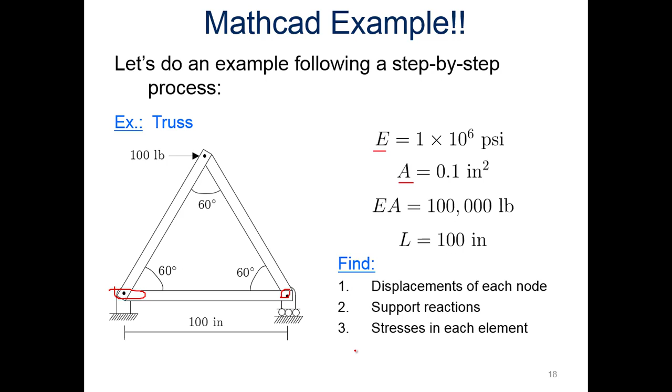All right, let's get to it here, just following that solution path that we have for finite element. First is the pre-processing phase. We need to determine what the nodes and elements are, and declare what they are up front.

We're going to say we've got node 1 here in the bottom left, node 2 on the right, node 3 at the top, and then element 1, 2, and 3. And again, we have to specify very carefully how these are set up.

So here's a table to show you that. Element 1 is made up of node 1 and node 2. Referring back to what we talked about previously with node I and node J, for element 1, node I is node 1 right here, and node J is node 2.

So when we look at theta, we're measuring up from the horizontal. How does node J move up from the horizontal? It doesn't in this case, so our angle is 0 degrees - I forgot to put the degree sign there, trying to fit it in real quick.

Then for element 2, node I is node 2, and node J is node 3. You can see if this member started out like this, and then worked up, and we measure the angle like this, we would get an angle of 120 degrees, because this interior angle here is 60, so the outer one here is 120.

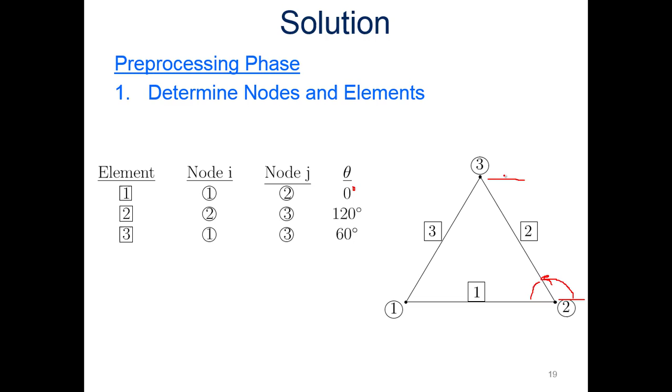You could also do it differently - you could have said for element 2, node I is 3 and node J is 2. Again, if you measure from horizontal, you could either measure this way and go around, or measure this way. As long as you're consistent and get these things right, you're okay. I would just focus on horizontal here, and 2 and 3 should work out just fine.

All right, let's look at element 3. Element 3 is right here, node I is 1, node J is 3. So just measuring up from horizontal, we're going to get 60 degrees - that's where the 60 comes from.

All right, so we've got our nodes defined, we've got our elements defined, we've got our angles defined. We're in a good place.

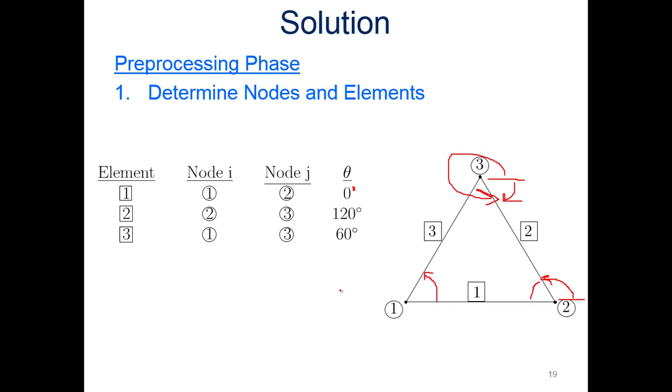So step 2, we're going to assume a solution that approximates the behavior of an element. We kind of already did this - we said our equivalent stiffness is going to be AE over L. AE we already defined as 100,000 pounds, divided by the length, 100 inches. So our K, or stiffness value, is 1,000 pounds per inch.

All right, so let's go see what we can do with that in Mathcad.

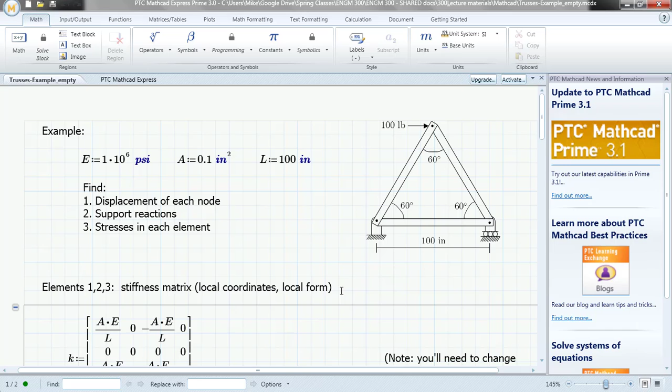All right, so here's your Mathcad file. Oh, by the way, I'm running Mathcad Express, so I do not have a license on this, what I'm running right now, so you should be good if you just want to download the free version of Mathcad. Sorry for the ads on the side - I think with Express I can't get rid of that. All right, so here we go.

We've got the modulus, 1 times 10 to the 6th psi, we've got the area 0.1 inches squared and the length at 100 inches. And by the way, if you haven't figured this out yet, I'll show you how to plug that in. If you say M, and then M colon to define the value, say 90, and then if you want to put in the dimensions, you can just type in what those dimensions are, so 90 inches like that, and it should turn blue to indicate it's been given a dimension. I just wanted to highlight that for when you get a chance to do that on your own.

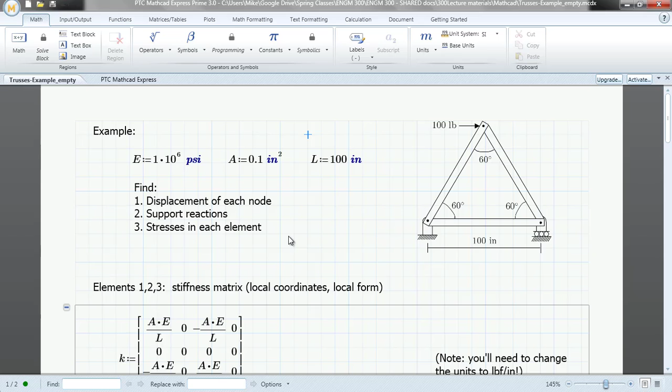All right, we've got our diagram over here to see what's going on. So scrolling down here, we've got K, our stiffness matrix that we showed from before, developed from the forces and the stiffnesses being applied to our single element. I'm just going to click on that and hit equals to see what those values are.

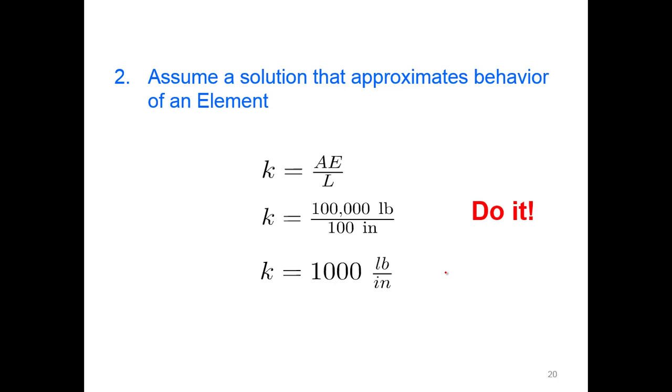We're going to develop equations for our elements. We need the stiffness value, the global stiffness matrix. That's our K value out front, multiplied by our cosines that have been set up here. This stiffness matrix we made over here in Mathcad, to be clear, is in local coordinates, local form. I'm going to go back to the presentation.

This is the global coordinates, but it's in the local form, where we're using the capital K. We're in the local form because we've still got an E here. All right, let's look at that. Here's our development of our global coordinates, but local form of our stiffness matrix.

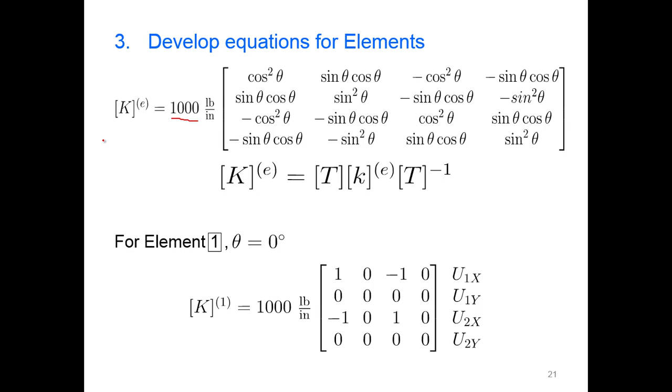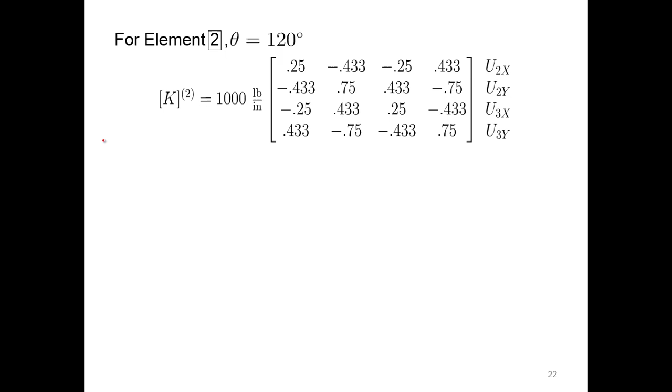For element 1, we know the angle is 0 degrees. So we plug in 0 degrees up top, and we come up with our global coordinate form as shown. We do the same thing for element 2, putting in 120 degrees—again these are all back from the table, back in step 1 when we defined nodes and elements. We get the values there. And for element 3, 60 degrees, we get the values there.

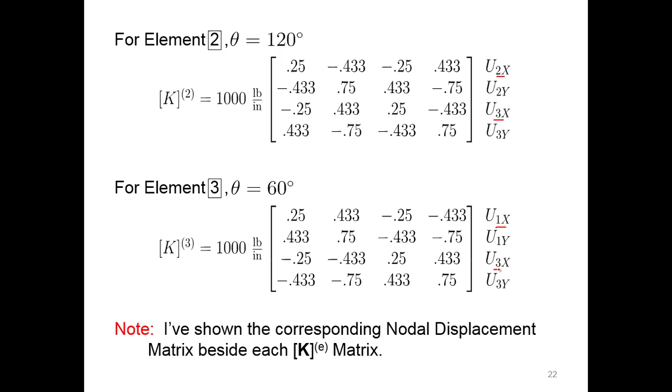I showed the corresponding nodal displacements because element 2 is made up of nodes 2 and 3, and element 3 is made up of nodes 1 and 3. All right, let's head and do that, see how we do this.

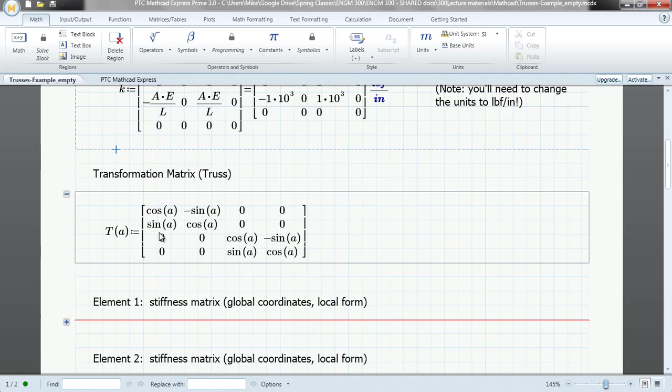All right, we're going to scroll on down here. So the transformation matrix, I already put this in—that's for a truss. Now this is the overall transformation matrix. We're going to go down here to element 1 and put in the angle. You can see it's radians to start with, that's the default, so we want to get our angle from degrees to radians.

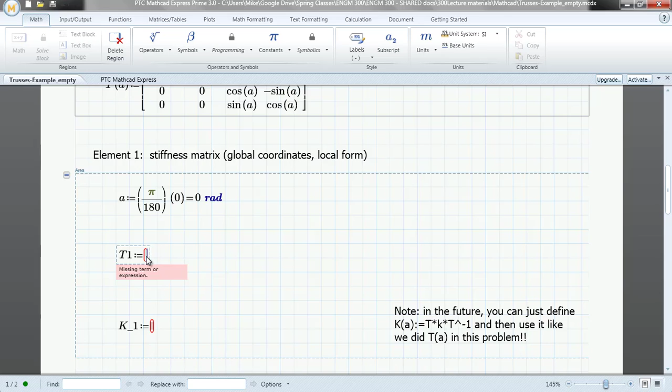For element 1, it's 0 degrees. Just hit enter there, so it's 0 radians. The transformation matrix, to make it easier on ourselves, I did this in terms of A, so A being the angle. The angle is defined here, so it's 0 at this point.

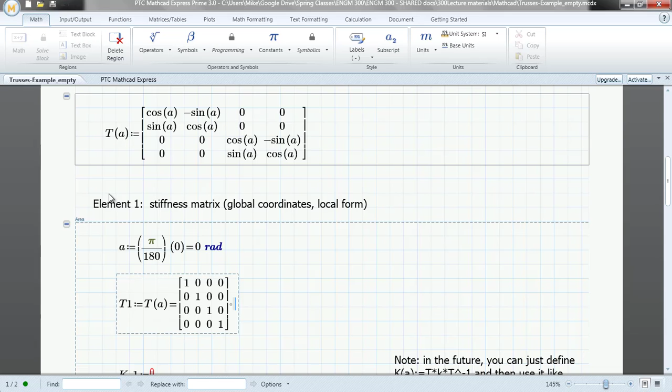I'm going to type in, use the transformation matrix up above—that's a function of A. So look here for A, and I'll look here for the transformation matrix. I hit equals, and I get all my 1s. All right, I'll slide down here.

Now I want the global stiffness matrix, because again, up here is the local stiffness, down here is the global stiffness—I'm trying to get the global coordinates. So we're going to pass through this one. We got T1, and just follow this form right here, from the presentation. So T1 times K, which was defined above, times T1.

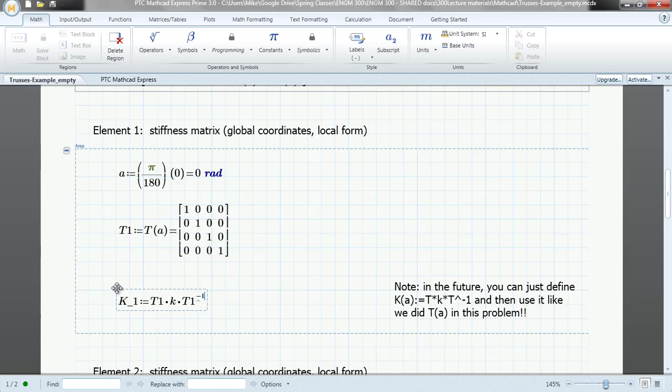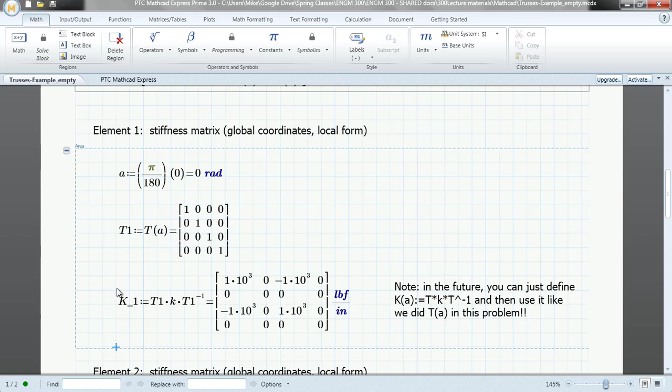Now you got to make sure you get the inverse, so caret or shift 6, -1, and we'll hit equals on that. All right, again watch the units there—we want to swap this out for pound force per inch. All right, so that's what you should get there for stiffness for K1.

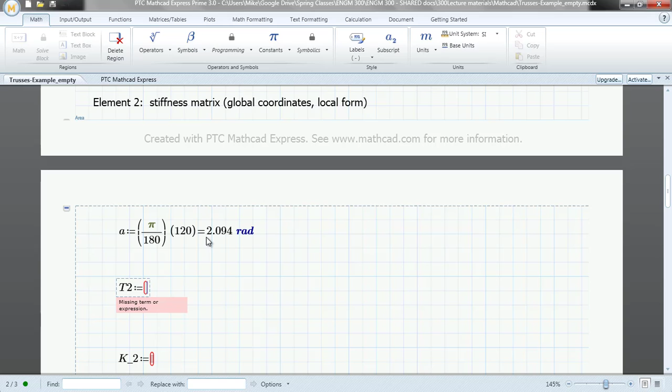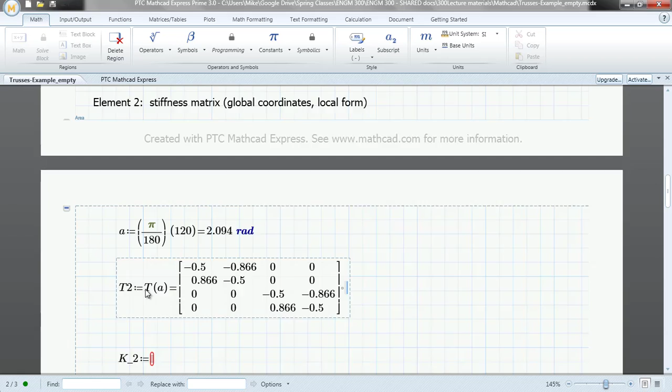Scrolling on down, expand this section. For element 2, we have the angle of 120 degrees, so plug in 120, and again we convert that to radians. Transformation matrix 2—now A, because the way Mathcad works is whenever you redefine something that's already been defined before, this one takes over. So A now, since I've defined it as 2.094, overrules the angle I defined above for element 1. I'm going to put in the transformation matrix as a function of A, and we get those values. Now I want the global coordinate form, so I'm going to put in T2 times my local stiffness times T2 inverse, equals. Again it's in kilograms per second squared, let's change that to pound force per inch, and we get that form.

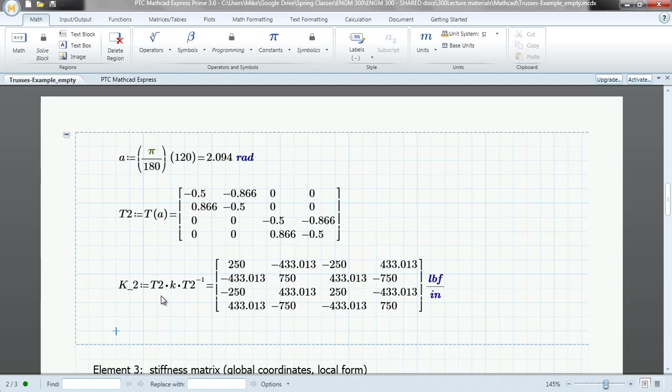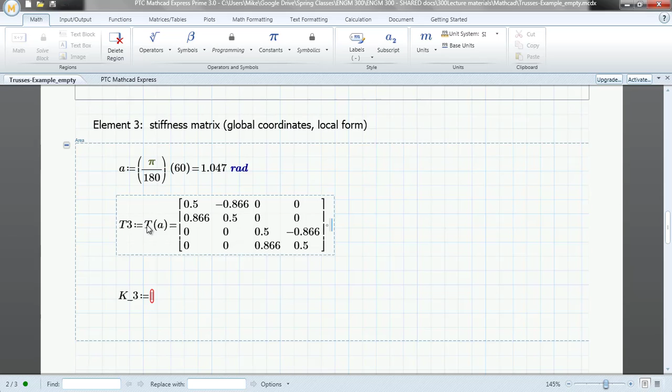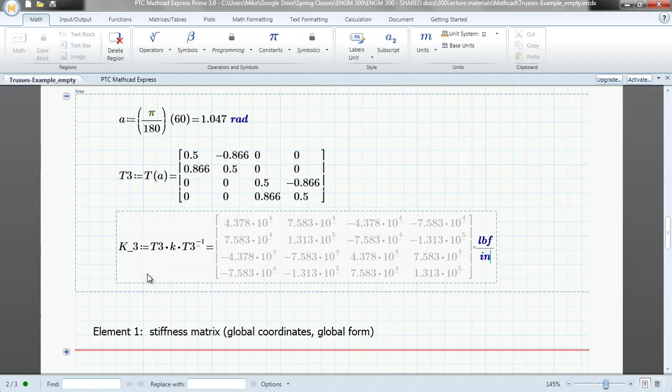Scrolling down for element 3, we'll plug in our 60 degrees equals, T as a function of A equals, and T3 times K times T3 inverse equals, and change the units to pound force per inch. All right, so that's what you should have there.